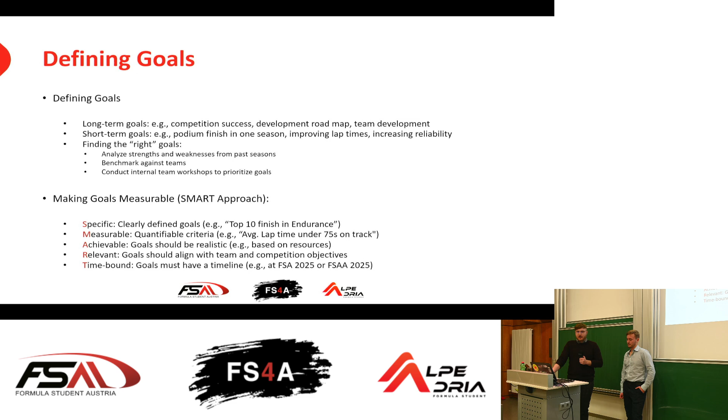If it's achievable, that's based on your resources, which you have to quantify to see if it's achievable for your vehicle. It should also be relevant to the Formula Student competition, and time-bound, for example by saying next year at FSA 2025 or Alpe Adria 2025.

Here's an example for long-term goal definition: say you're switching from a combustion car to an electric car. In the first year, switching from CV to EV, building your own battery, your own inverter, your own motors, and implementing a torque vectoring control system would be a target for a team that is, I think, barely achievable within 1 year.

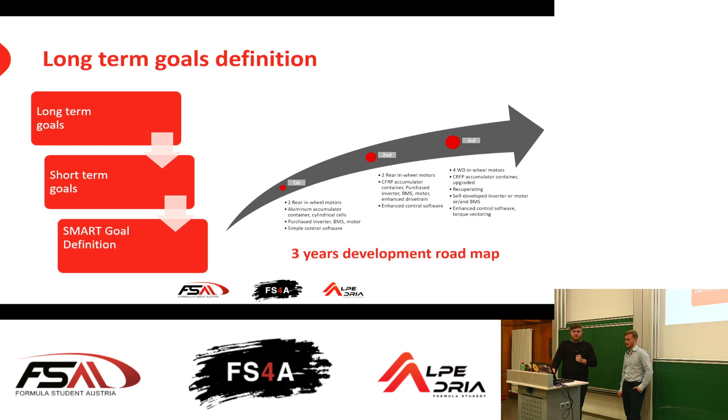But if you're setting up a 3-year development plan, for example starting with building your own battery, then an inverter and motors bought from a company, and after that setting up to develop more things on your own, it's easier to achieve than saying you want to do it all within 1 year.

And then we are coming to the overall vehicle concept. So what is the overall vehicle concept? The overall vehicle concept is the big picture of the development road of your car.

It focuses on the main parameters of your car: the size of the car, the weight of the car, the aerodynamic values of the car, and the design philosophy of your car. That's your basic ground, your ground base for the design process, for coming down to the submodules and the single components of your car.

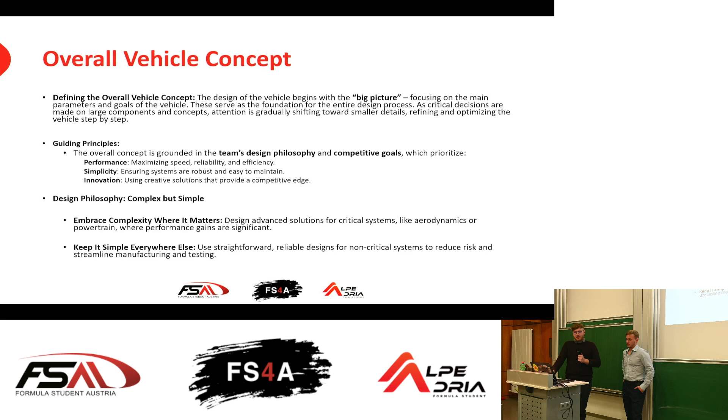Here the guiding principle is, through the design philosophy, to set your competitive goals, for example performance, simplicity, or innovation. You can implement a design philosophy of complex but simple: complex solutions on the parts and components where it really matters from a performance and reliability point of view, and on other, less influential components, a keep-it-simple strategy using more straightforward solutions.

And so, how to get the overall vehicle concept, you can use some effort for the goal quantification. At the beginning you can do a point analysis after your season for weighting the disciplines to the overall competition, to see where you were performing and by how much. With that you can also use it for identifying the key performance factors of your car.

You can use lap time simulations, and it doesn't need to be a very complex 4-wheel or 2-wheel model. Already for identifying the key parameters, a simple point mass model can quantify most of the key factors for your car. With that, you can do sensitivity analysis for understanding which parameters and which modules of your car have the greatest impact on success.

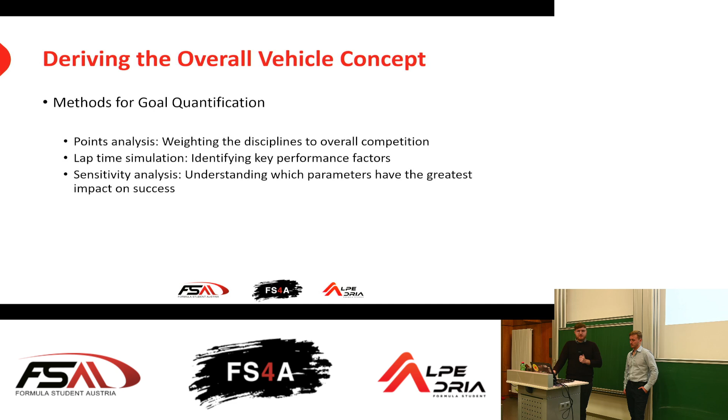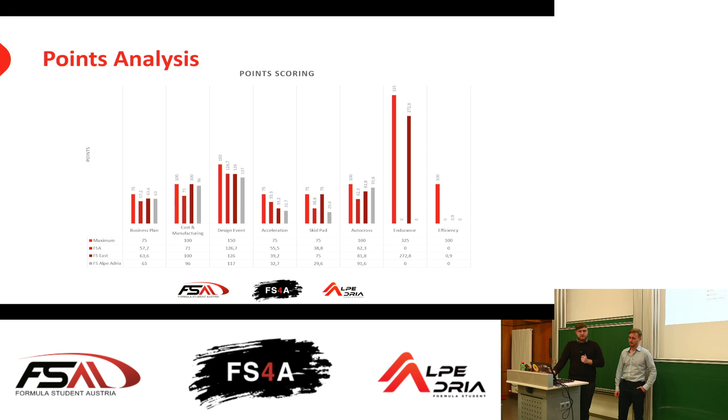So for example, here is an example of a points analysis from a team from a previous year, where you can see the maximum points of each event and how the team was performing. With that, you can clearly see some trends of where a team can improve to get more points in the competition, and you can already set some targets for your next year's goals.

Regarding optimizing the overall competition performance, in Formula Student the winner is the team with the most points overall. We already covered in previous presentations how you can gain points in statics. For the dynamics disciplines, there's one parameter in every discipline: time. In skidpad, acceleration, autocross, and endurance, the time is your target, and with the time you set, you get your points. So there's one parameter where you can optimize your performance for the car.

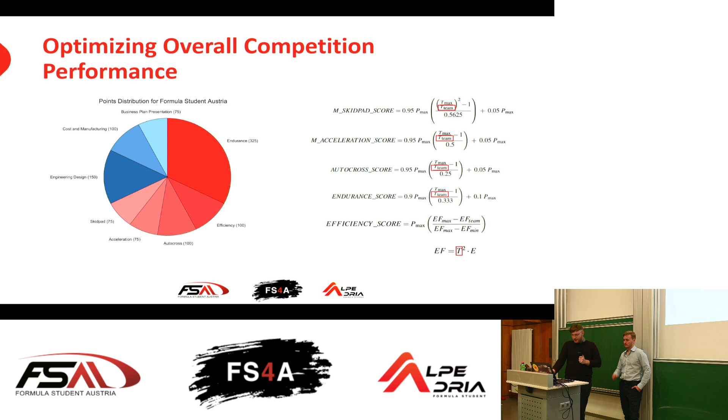With that, you can break down your goals into the modules. So you have the parameter lap time, and you can see the influence of aerodynamics, suspension, tires, drivetrain, powertrain, electronics, vehicle dynamics controls, chassis, and of course the driver, which is a big influence on lap time.

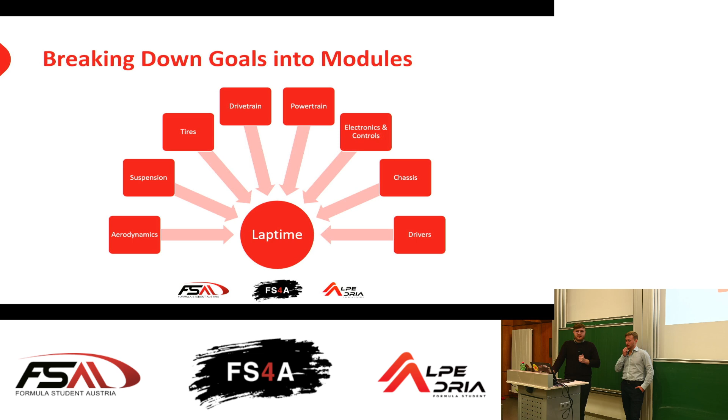And so you're coming now from the team goal to the overall vehicle concept. You can subtract it down to the modules, and then afterwards to the components. That would be, for example, the process overview.

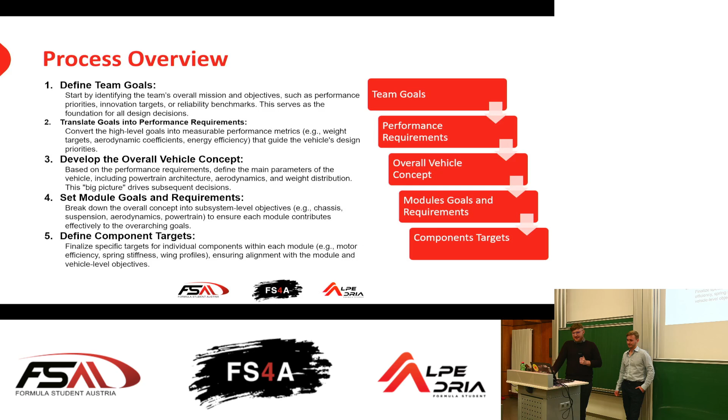At the beginning, you're defining your team goals. Then you translate your goals into performance requirements. Then you can develop the overall vehicle concept of your car. This could also be an iterative process, since some parameters are never fixed. Then you set the module goals and requirements for every module, and afterwards you can define the targets for your components.

So what really matters for performance? Is it spending 100 hours developing a new display interface with smartphone interaction, so that during testing, when someone is changing the setup of the car, or you are in scrutineering, the driver can play some games with his smartphone on the display? Or is it spending 100 hours developing new suspension kinematics? It's up to you what to choose.

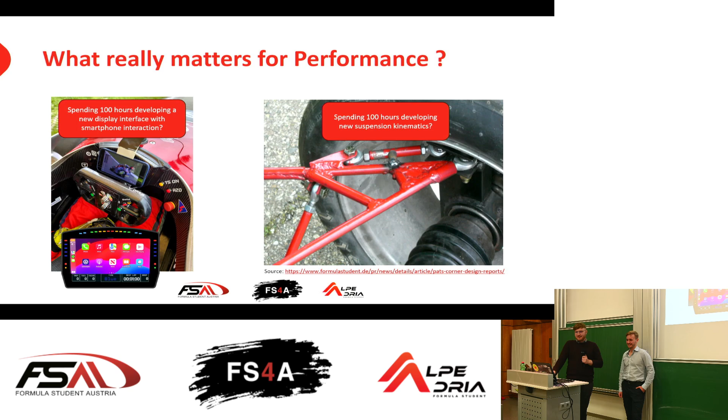But what really matters for performance comes down to some key parameters. The first would be the weight of the car and the height of the center of gravity, which have a big influence on the lap time of the car. The second would be the tires and the grip - this also means the suspension grip and keeping the tire in its perfect operating window. The third would be the powertrain, the power of the car - also how much power you can draw during endurance and autocross has a big influence on your lap time. For the electric cars, yes, it's limited to 80 kilowatts for acceleration, but if you have a drivetrain that is more efficient, you can also gain lap time there.

And the fourth one is the aerodynamics - you see quite a lot of teams running aerodynamic devices and wings, which of course also has a big influence on the cornering performance of your car. And the fifth one is the driver - there's no point building a car without a driver who can drive it well.

The driver is like the connection between the car and the path where the car should go. So the driver is also a very important factor here.

And the sixth one, which maybe some teams are not thinking that much about, is reliability, because to finish first you have to finish.

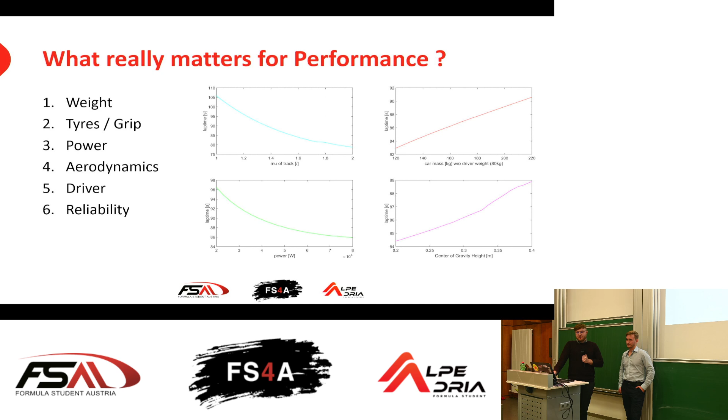In the endurance, here you can see the total amount of teams in electric and combustion engine which were running in the endurance over the last five events at FS Austria. The transparent ones, or highlighted bars, are the teams which successfully finished the endurance in FS Austria. On the right side you can see the failure rate of the teams which did not succeed in the endurance.

This is for both categories. Over the last five seasons, the failure rate was over 50%. For example, in the electric category in 2022, it was almost reaching 90% failure rate of teams participating in the endurance.

So with that, from the reliability standpoint, it's maybe good to mention it. And I'm handing over the word to Markus, who can introduce how to improve on reliability and risks.

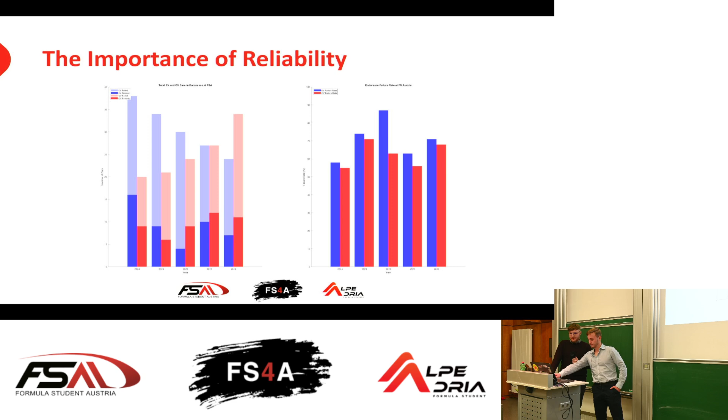I'm going to talk about risk assessment and prioritization, because like Christian just mentioned, there's been a clear loss of focus on reliability in Formula Student in general over the past years. The idea behind this presentation is to give some tools and ideas for how to improve reliability engineering and the overall risk assessment process.

I'm going to introduce a tool which is commonly used worldwide, but among Formula Student teams, it's rarely used to its full potential.

I'm very convinced that if you use this tool as I present it here, you'll see some improvement. It may vary based on your resources or circumstances, but it will for sure improve your overall risk assessment and further your reliability.

The main point I'm going to talk about is the decision matrix. It begins with the identification of the parameters - we need to know which parameters are important to achieve our goals.

If my goal is to win every competition and discipline and be the fastest, performance is going to be a very important parameter for this goal. If I want to finish all endurances and be the first to pass scrutineering, reliability is going to be a very important one. So those parameters are very important to identify.

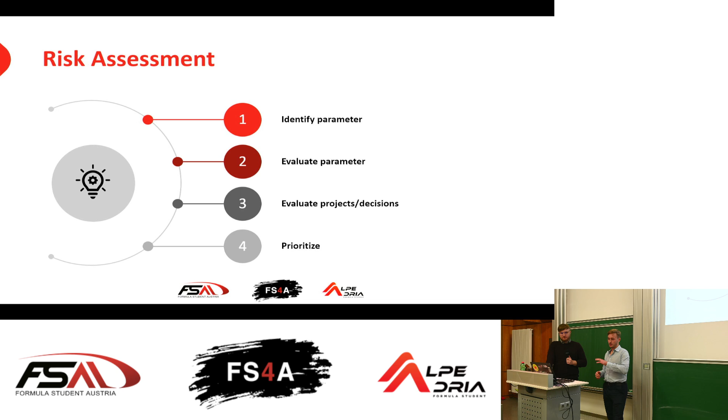Then after that we have our decision matrix, and the input is our projects or our decisions. We can evaluate which projects should be more focused on, or which need more resources, money, or time. The last part is the actual prioritization, which is the final step in this whole process. So, a little case study or example.

Let's take an imaginary team. It attended 3 competitions last year. It did not finish any endurance, which is sad, so they want to change something about that. On the right side you can see their car parameters and their results in the competitions.

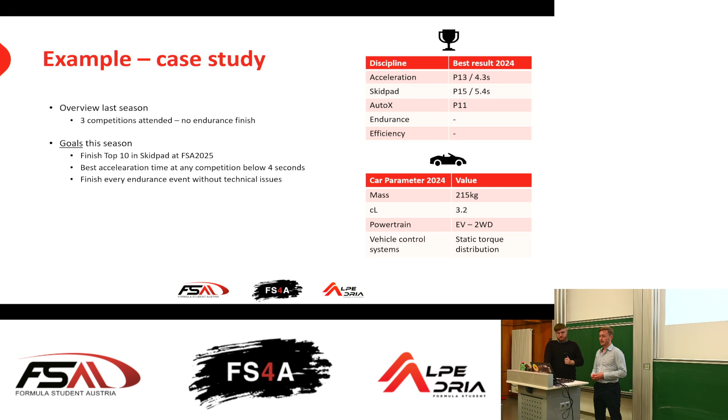And they set, as Christian introduced earlier, 3 SMART goals - specific, measurable, and so on. The first is to finish top 10 in skidpad at FSA 2025. The second is the best acceleration time at any competition should be below 4 seconds, and they want to finish every endurance. Well, those goals sound nice, but now we want to know how to actually achieve them and how to quantify them, because that's what we ultimately want to do.

So, parameters. I've identified 4 parameters for this team, but if you do this analysis yourself, you may come up with different things. For example, if you have unlimited money, which most teams don't, resources might not be your main concern and might not be a parameter. Or if you have unlimited manufacturing power and machines, maybe feasibility isn't an issue for you. So this is very individual for your team and for the framework you have to work in.

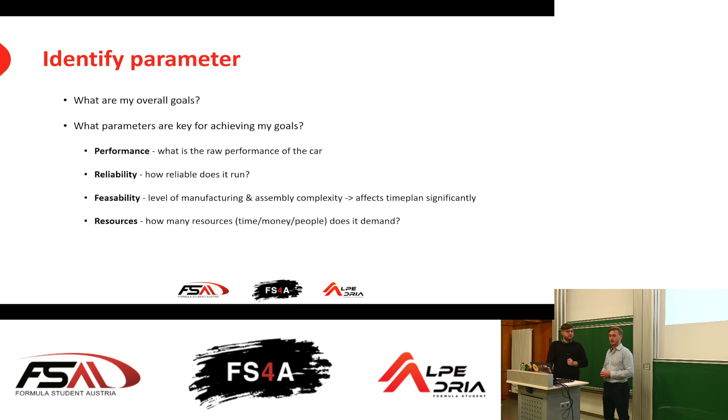But let's say those 4 parameters are, I think, quite common for teams and very relevant for them. So after I identify the parameters, I need to weigh them, or evaluate them, based on my goals.

Here you see a matrix. Basically, I put in performance, reliability, feasibility, and resources, and then the rows are the goals. Then I quantify how much impact or how important the parameter is for the goal.

For example, I just take one: top 10 in skidpad FSA 2025. Performance, 5 is very relevant and 1 is not so relevant. I take 4 here because it's a decent improvement from last year, but it's not nearly impossible.

It's quite ambitious, but a 4 is a good score here. Then reliability - of course you need some reliability to drive the skidpad, but it's not like you need to finish endurance or something. You get 4 runs in total, 2 for each driver, so you have some room for errors if something happens. So 2 is the adequate score for reliability, in my opinion.

Feasibility doesn't really depend on how complex your systems are or how you design your parts, because skidpad is a very isolated topic from that. This might vary if you have some special conditions, but as I said, this is very individual. And the last one, resources.

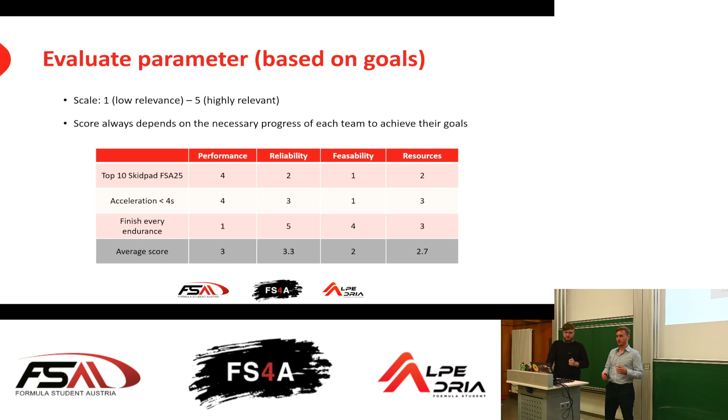So that's exactly what I wanted to do - to know where to weigh my parameters and what is important for my overall goal. Next is evaluation of the projects. Now I do exactly the same, but inputting the projects instead of the goals.

Here I take as an example the chassis decision: do I want to keep steel tube frames, or make monocoques - a very simple geometry where you just put carbon fiber on it and it will hold - or already a very slim, lightweight and optimized carbon fiber monocoque.

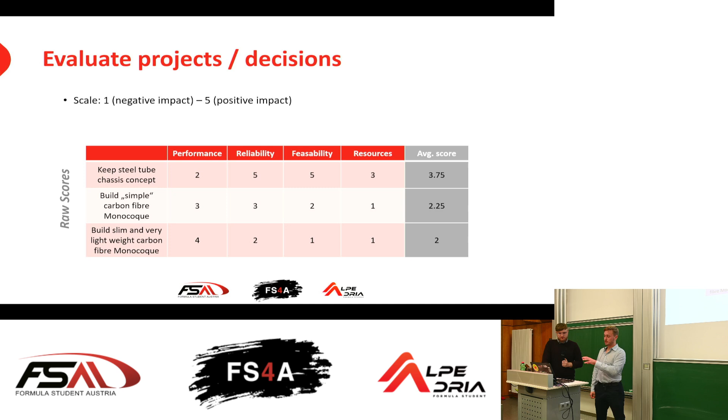Those are 3 options, and there I put in those inputs again, I score them, and after that you can see the average score is 3.75. In this example, in the raw scores, the steel tube makes the most sense for this team.

But we still have the weighted parameters, so we multiply the parameter score with the project score, and then we get a total score, which will be, as you see, 40.6 for the steel tube frame. In this example, it's very, very clear that steel tube frame is the right decision.

So this isn't rocket science at all. This is very simple to do, but you need to do it. This is the big key point.

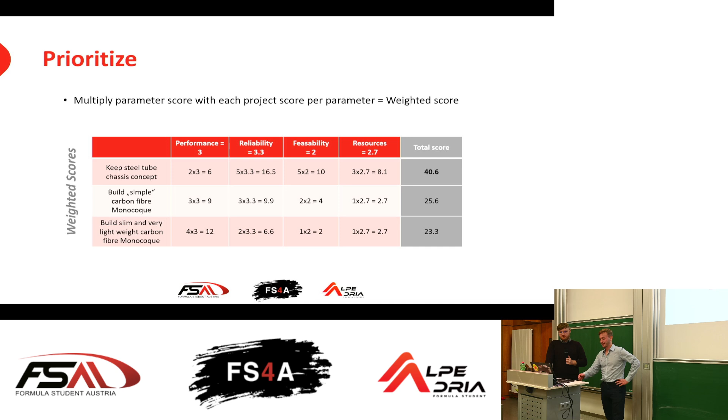If you follow this through, you will notice a lot of interesting decisions that have been made in the past and may be made in the future. So I really recommend trying it once or multiple times, and you will see some interesting results.

So to give you a bit of a bigger picture, this whole tool can be applied to every level of the team. We can start with the management, for example, which would be the Formula Student team and the board or whatever they are called. They need to decide whether to put money - they have some money left and want to invest it into chassis or low voltage electronics or something.

This is a decision that must be made, and with this tool, it helps you decide on a data-driven basis what project is better. And the same for all the other levels. Very important here: it's a top-down model, so it doesn't make sense to start from the bottom and go to the management level at the end, because you want a holistic approach where you give an idea and this idea spreads through all the modules evenly.

Also very important, the higher the level of the hierarchy, the more depth of analysis is required. For example, if I want to choose between two connectors for low voltage or for the wiring harness, I can make that decision basically alone, or this might be quite an easy decision relative to others. So there's not a lot of analysis needed.

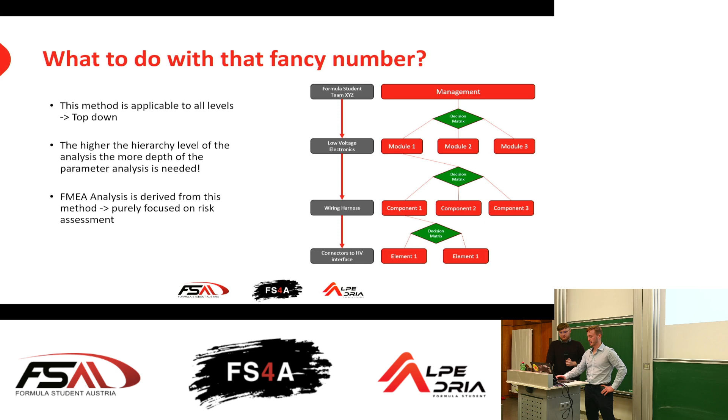So the next topic is reliability specifically, as I said, this might be a big topic in Formula Student in general. I guess most of the teams have some kind of goal regarding reliability, or they might say okay, I want to build a reliable car and we want to finish every endurance, but most teams don't really quantify it, like every other goal should be quantified. So I want to give an example of how to actually do reliability engineering, or at least one approach that could be useful to you.

So why is reliability important? First of all, obviously, because to finish first you have to finish. But here you can see the loss in case of system failure is far greater than the gain if everything works out. Some great engineer must have said this at some point, but it is very true. In the worst case scenario, you can lose so much more than you can gain if everything works fine. So it's always about risk management.

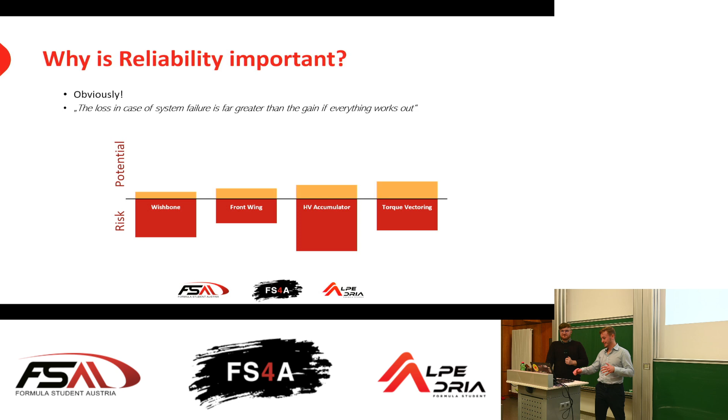And this is also very important, because this slide tells you: do not touch any projects or components where you don't see enough potential just for fun, because the risk is still there, but there might not be any potential. This is a very important point about this whole topic.

So the reliability process is basically analyze, monitor, and validate. Analyze is here - we start with the goals, and Christian earlier mentioned the long-term goals, short-term goals, smart approach goals, and he focused on the performance goals. For example, I want to finish top 10 in skid pad, below 75 seconds in autocross, or something. But there are also other categories of goals, for example reliability.

This can be, I want to be very fast and the first one to pass scrutineering, and to have a car that runs 1,000 kilometers in testing, I don't know. There are a lot of different goals that can be made based on reliability.

And as with all the other goals, you need to break them down into the modules. So the goal is for each module to know how it can contribute to this goal. Ask yourself the question: does every module leader of your team know exactly why and how he or she can contribute to the goal that we want to finish endurance? Does everyone know that? Maybe yes, maybe no, but this is a very important question to actually think about.

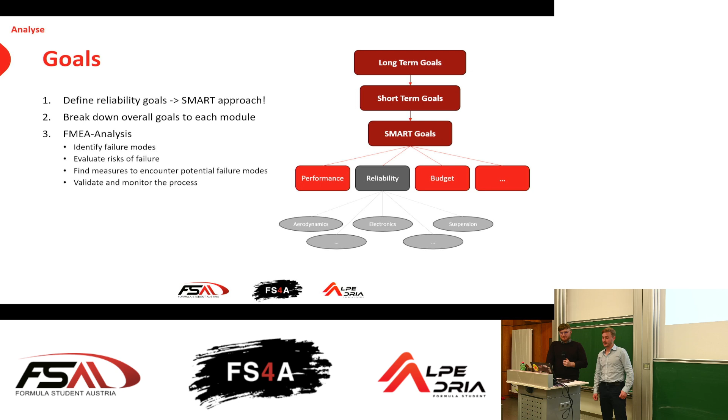And after that, we do the FMEA analysis. The key point of the FMEA analysis is to find the failure modes and how to prevent them, and to quantify the risk of it happening, or how big the risk is for us as a team.

In this case, we have a goal like to finish endurance, and in this example I take the suspension module. And the breakdown goal for the suspension is, okay, we should have no suspension failure, obviously, but we also shouldn't have any leaking fluids, and the ride height should be constant, because you could get a DSQ in post-scrutineering. Maybe there are more, I haven't thought about it in very much detail - that's up to you then.

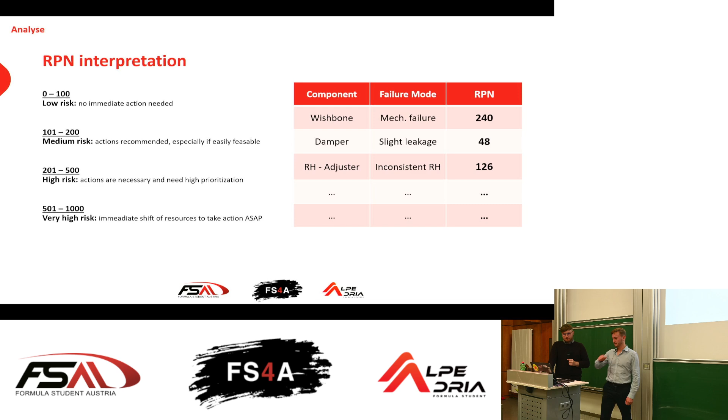Practical tips for this whole analysis: as I said, it's always subjective. It may vary between teams, sub-teams, even people in the same module, or even the same person two months later. So this is really, really subjective, so be cautious with the results and the absolute numbers.

Also very important is to find the right scale, as I mentioned before. What is severity 8? It's already really bad, so a flying wheel should probably be above severity 8. And likelihood of detection 5, what does it mean? You need to find all those answers to these questions in order to get good results.

And trends, not absolute numbers. As with all processes and simulations and so on, it's never about the absolute numbers, it's really about the trends. If you see that one project stands out as very risky, you obviously need to focus on that. But if three are there up top and one has two points more than the other, it doesn't really matter.

It's really about the big differences that you want to find out. Also, as I mentioned shortly, results are only comparable if it's the same project phase, same scale of evaluation, and same level of detail. For example, if I make this analysis with the whole suspension subsystem and compare it with maybe some bolts or some things that are very into the detail, it doesn't really make sense.

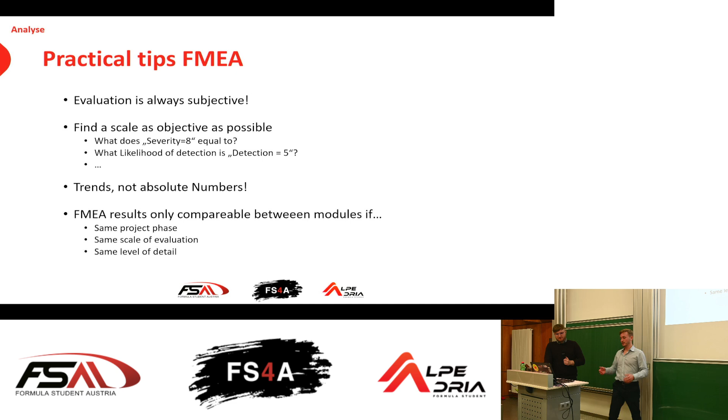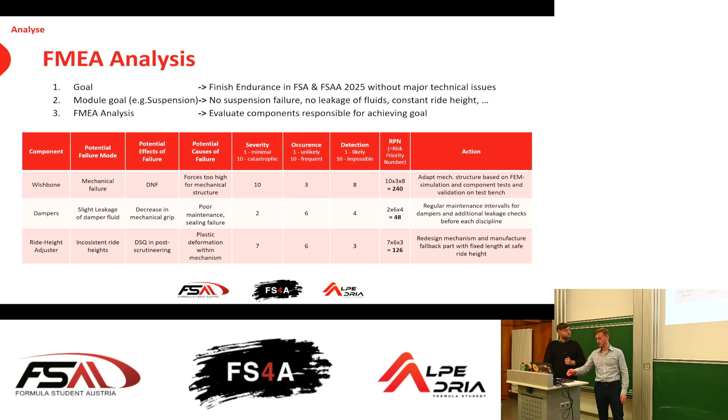After that, monitoring is very important. You do this FMEA analysis, and you can see here at the very right, there's the action. This action is how to prevent this failure mode from occurring, and as soon as you take that action, you need to monitor it. Because otherwise it's just a black box, you just try something and at the end you see if it works or not. So monitoring is very important.

For example, in software, it's really important to implement debugging modes early on, because the later you do it, the worse it gets to actually know what happens to the system. So think about it early. For mechanical parts, it's mostly test benches or FEM simulations. This is obviously very important, but also for this monitoring course, it's very, very useful.

For the VCU software, for example, you can also use error messages with error codes that are very distinct, so that as soon as the error message appears, you really know what happened and in which subsystem, maybe even which error. So the better you can debug your system, the better your results will get.

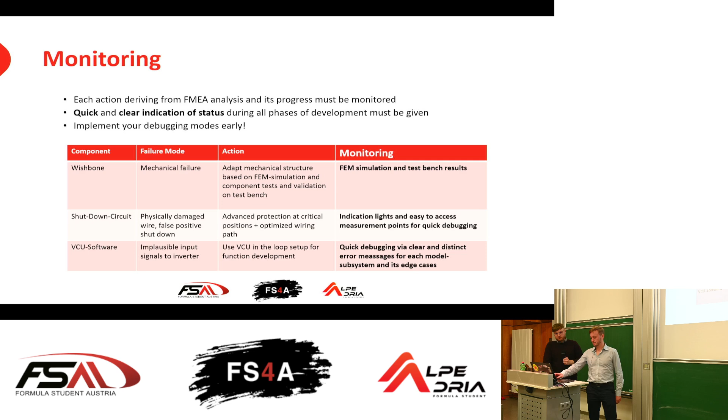Then validation, also very important. You start with the component. For example, I take the wishbone again, but I don't have anything against suspension guys, so don't worry, it applies to every other module as well. Take a wishbone, test the basic functions, make some stress tests or whatever you can and want to do with it. If this holds these tests, go into the subsystem, which may be the whole wheel package with the wishbones mounted already, or another system. This really depends on your car and your assembly. There you have the first integration test and validation of the first interfaces, which is also very crucial.

If this is fine, you can go into the car, like the standstill car, build the whole car together and see if there are any issues, or if you have motion sweeps you didn't do in your CAD system or things you didn't prepare beforehand, then you need to fix it. As you can see, if something doesn't work, you really need to iterate and go one step back. Never go forward and try to think it's gonna be fine, as soon as we drive it's gonna be fine, the problem will solve itself. That's never gonna happen. So always go one step back until you solve the issue, and then you can proceed to the next step.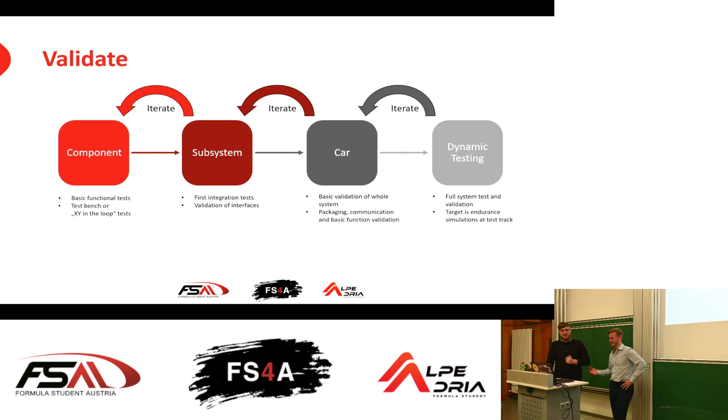Okay, thank you. So now we're coming to the last part, to testing. So why is testing important? After you have built your car and assembled it, you're going to prepare for the competitions. Testing there is very crucial for identifying issues and problems, and maybe some reliability issues of your car, to find it out during driving.

So there are three different types of phases during testing. The first one is the shakedown test, where you just assemble all the parts which you need for your car to keep it running, to see if the powertrain is working and everything is working from a mechanical and electrical point of view.

That the car can drive itself. Then afterwards, the full system integration period starts. There you're increasing the power and the load on your components step by step to get to a competition-near performance level and load level of your car, so that you can test your car into a competition-ready testing state.

So it's very important to be as soon as possible in competition-ready testing, because if you, for example, have some components still not manufactured and start testing already with your car, then after a month you're getting some upgrades on your car, for example from aerodynamics. If you get those parts afterwards, you have periods where your car is never finished how it should be at the competition.

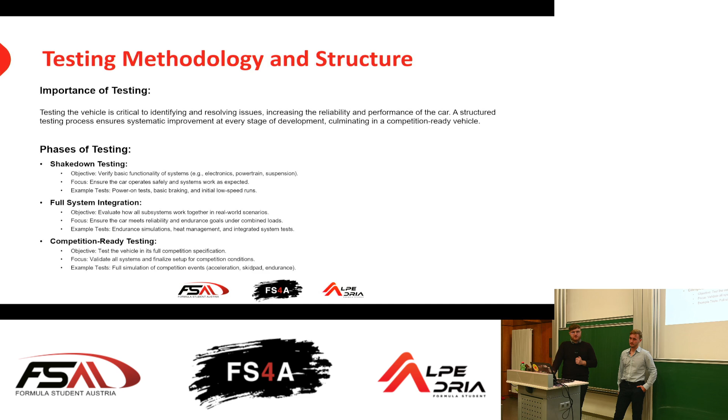For testing to be very efficient, you set the targets so the car should run in a scrutineering-ready state, meaning the car can also positively go through the scrutineering. In the competition-ready testing, the focus is on preparing for the single disciplines and getting as much as possible out of the car at its status after manufacturing.

So, talking about testing efficiency: the key objective for testing to be efficient is that the car is in a scrutineering-ready state as early as possible, because missing components of the car can influence the behavior of your car. Therefore, it's always the target to have the parts as early as possible on the car.

And it's also for being efficient. You should set yourself the target before the testing phase to have a detailed testing plan, with clear targets which you can set up for planning your testing days. Because if you are not setting your targets for your test plan, the test day will start like that.

At the beginning of the test day, you will discuss what to test, and with that you may go into the direction that you do some software tests, for example, for improving the vehicle control software, but never testing an endurance, for example, before the event. So that is also another point on which you set yourself on the plan before the competitions.

Plan several endurance tests where you really do it like endurance. So it's not having a total mileage over the day of 22 kilometers. That's not an endurance test. You really have to test like the first driver is driving 11 kilometers, then you do the driver swap, and the second one is doing 11 kilometers, so that you really can see some reliability issues which you may have during the endurance.

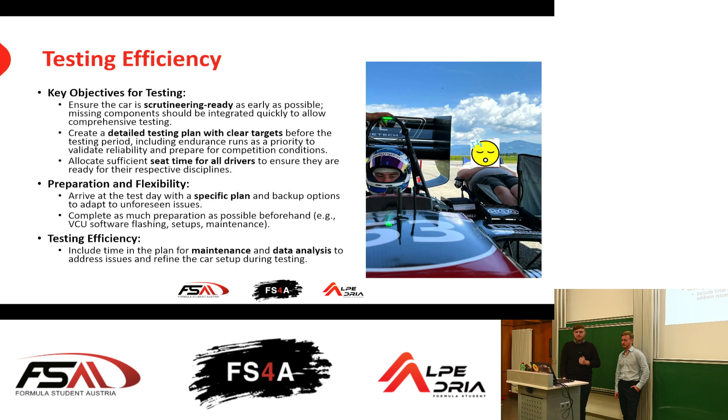And then testing documentation. I know it's not always the fun part of testing, but it's for being part of the complete development process. Testing and validation is the end point and gives the information for the starting point. So testing documentation is some stuff to do, which is then for the people afterwards, and in the post-season quite good to know, and also at competition if you have to change some setups, quite good to know on which day what was set up on the car.

And here is, for example, the testing documentation, a point where you track the weather data. It can be a simple screenshot from a weather app on your smartphone and implement it in a Word document, for example. Then also store with these documents the telemetry files of your car, or link it to it if you have the possibility to log files on the car.

Then also a setup sheet, because every car in Formula Student is built to modify something during driving, and it can be changed because weather conditions are also not always the same. So you may have to change your setups for some weather conditions. There it's good to have a setup sheet documented, to have a look, for example, if you have a similar track temperature on a previous test day at the competition, you can check the tire pressures, for example.

And then also if you have video onboards, which are also sometimes quite useful for debugging if you had some mechanical failures.

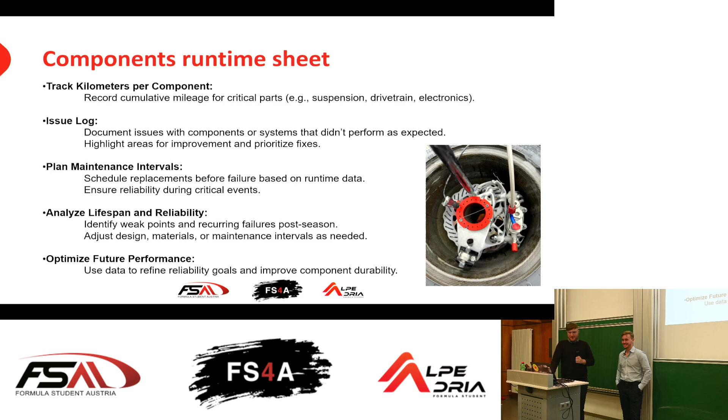One of the questions is, how do you judge the effect on lap time of possible changes to your car that you cannot predict with a lap time simulation? Given that testing with the old car is also not possible.

If I understand correctly, for example, if you're starting from a combustion engine to an electric car, and you don't have an old car for testing or anything for validation, you can still get data for the components you need, like the torque map of an electric car. With that, you can already do some studies. Even without validation, you can have a look. I wouldn't put it on absolute numbers, but you can still follow the trends and see how it's influencing the behavior of the car.

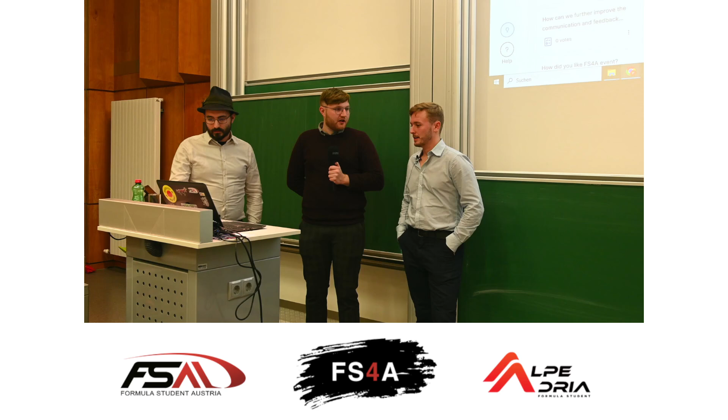Maybe something to add: this issue or this change, some other teams have already gone through. So maybe ask or look for teams who may have faced the same issue or the same change in concept, and ask them what they learned about it, because student teams are very open-minded to exchange information. That's your best shot, apart from the answer Christian gave you.

Okay, we have just one more question, which I will answer. The question is, when there are cars on track which are very different in speed, because one car might be already basically broken down and only limping around at 30 kilometers an hour, what can be done to prevent this? Because the faster car can only overtake in designated overtaking zones.

You have to look at it from our point of view, from the event point of view, and also from the point of view of the slower team. Would you, as the slower team, like to be basically dropped out of the endurance and not get a chance to score any points? Or would you like to have the chance to limp home with your half-broken car and still get some points? We have to draw the line somewhere.